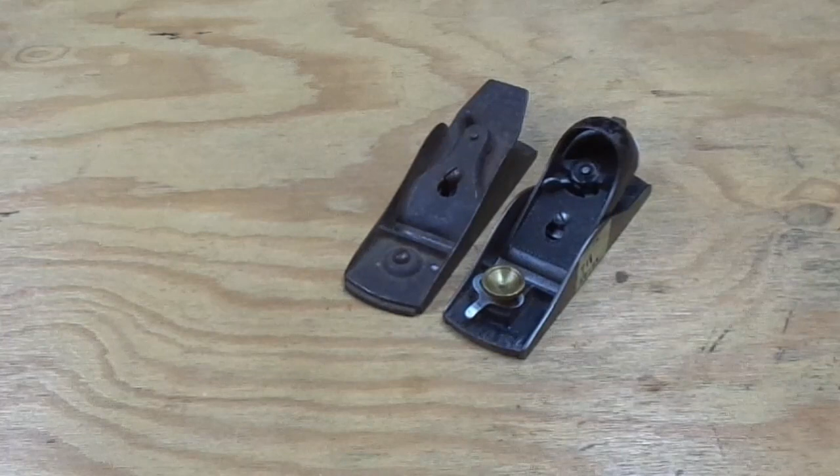This here that you're looking at is either a 9.5 or a 9 3/4 Type 1. This was put out by Stanley in the early 1870s. This was the first of Stanley's block planes, the progenitor of this guy, a later model 9.5. And Stanley basically created every permutation you could think of for a block plane.

Here's a number 18, Type 8. This is a number 17, which looks a lot like this guy, but with nickel plating. Then there was the 220 family that spun off. This is a modern English version of the 220. Here's an older version of the 220, and it didn't stop just there. Stanley came out with the simpler model, the 110, and a permutation of the 110.

And of course, it didn't stop at Stanley. Here's an American boy plane that was obviously patterned after the 110 family. And it wasn't just Stanley - all of Stanley's competitors had hand planes that looked a lot like, and certainly functioned just like, these guys. And all those block planes, I think, owe their existence to this unassuming guy here.

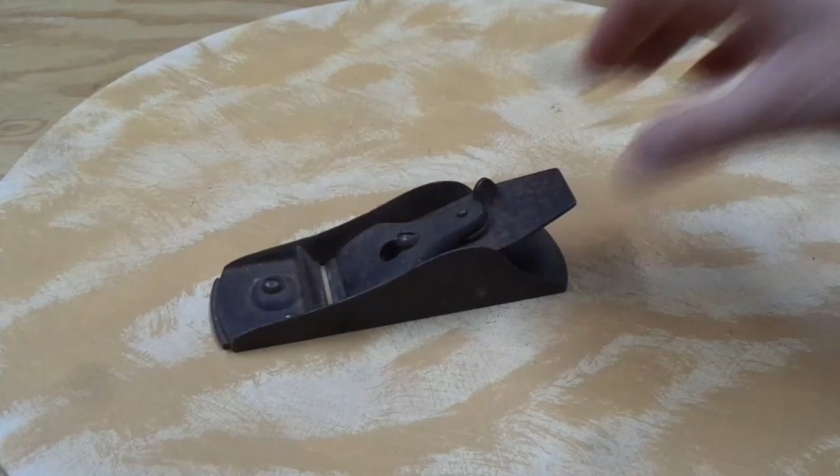There is no front knob, but instead just a screw that I have not even tried to loosen to adjust the throat in the front. The lever cap, as you can see, is kind of similar to a bench plane. There's no relief in the back, and there's the cam lever on it, the iron, and here's a better view of the body. And this is not a lateral adjust lever here, but a depth adjustment lever.

Well, I did some research on this guy. I think most of us are familiar with the common block planes, but I don't think a lot is known about these really early versions. Most of my information came from three sources. There's Patrick's Blood and Gore website, which is just a treasure trove of common language information about all planes Stanley. Virginia Tool Works had a very nice website that laid things out in an easy to understand way. And finally, there's the John Walter book.

He not only goes over all of Stanley's planes, but he has a type study on the 9.5 and 9 3/4 and its families of planes. There's also a historical narrative in the book that he refers to as a type study, written by John Wells and Jack Scholhammer. Hopefully I'm pronouncing those names correctly.

According to the type study, this model was likely manufactured in 1871 because it debuted in the January 1872 catalog. Other sources say it was first offered in 1873. The type study also claimed that the 9 3/4 debuted in the 1872 shirt pocket catalog. So apparently the 9.5 came out a little bit before the 9 3/4.

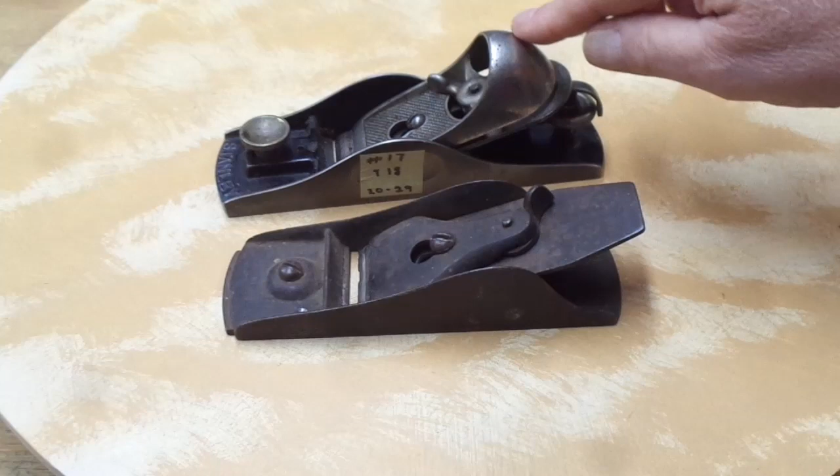Stanley almost immediately went to a different lever cap design, and I don't have a Type 2 to show you, but from the drawings and pictures I've seen, it's kind of similar to this one. It curls up a little bit more, but they very quickly got a more bulbous raised back here to push on. And after several permutations, it eventually morphed into this shape that we're all familiar with.

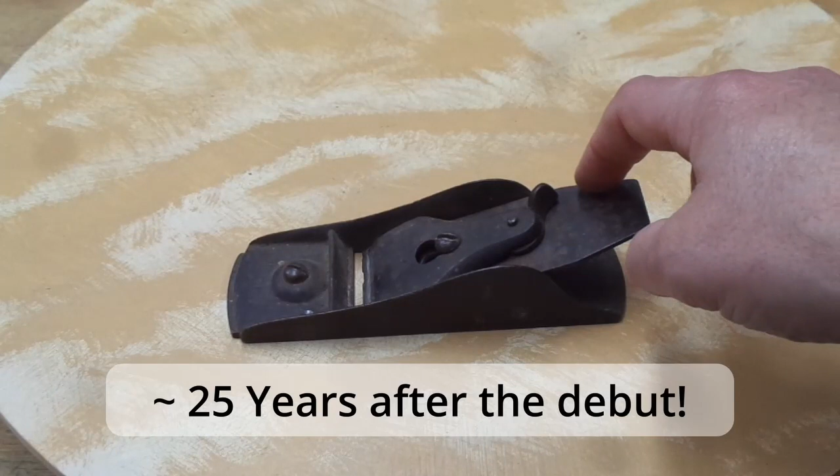Stanley didn't get around to making the rounded back iron until the late 1800s. And with the debut of Type 2, there was a knob that appeared here. However, the eccentric lever we're all accustomed to didn't show up until around the 1890s. This backward-leaning stance of the cheeks is known as the Excelsior body style, as opposed to the far more familiar, more or less centered cheeks of pretty much all of other Stanley's planes.

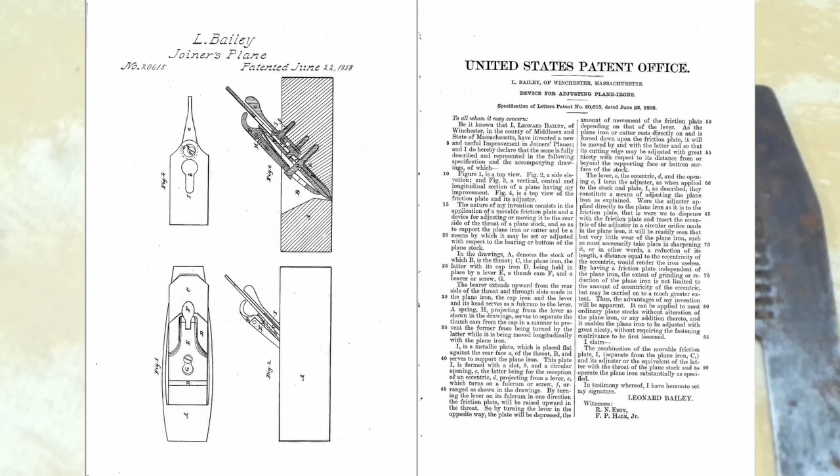This depth adjustment lever here is covered by Bailey's patent of 6/22/1858, which describes using an offset cam type lever to advance and recede the depth of the cut of the iron. Here you can see the pivot point is offset, and there's a pin which engages these grooves in the back of the iron, and as you move the lever back and forth, the pin goes forward and backward, adjusting the depth of cut. So here's the patent.

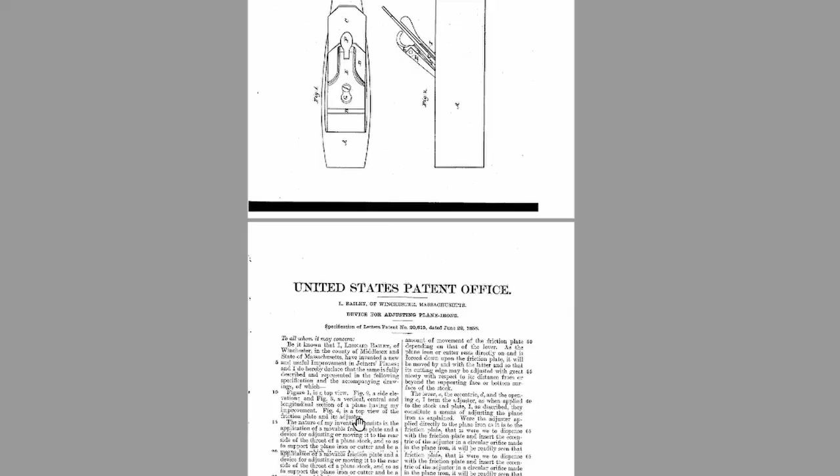Here's the diagram of the business end of it. And this here sits behind the iron and the cap iron and the lever cap. It's kind of hard to see. Here's the lever, and here's the screw. That's the head of the screw here.

And let's go down and read some of the text just to get a flavor for it. So it starts up here at the top. I, Leonard Bailey of Winchester in the county of Middlesex in the state of Massachusetts, have invented a new and useful improvement in joiner planes.

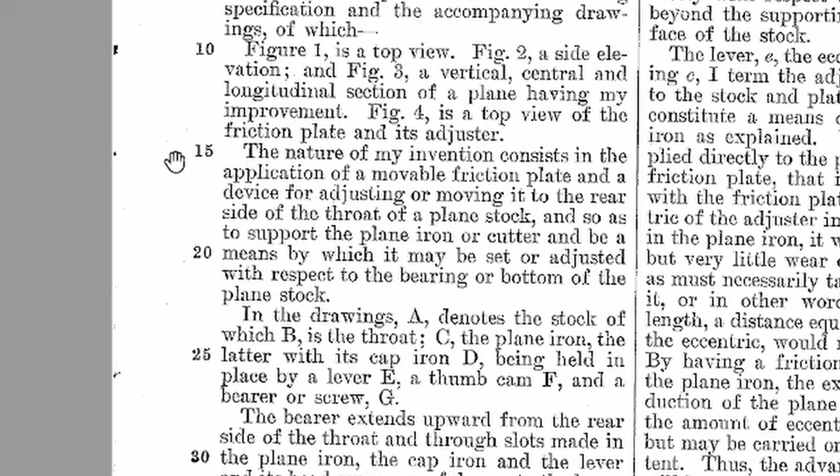He says up here in this paragraph next to number 15, the nature of my invention consists in the application of a movable friction plate and a device for adjusting or moving it to the rear side of the throat of the plane stock, so as to support the plane iron or cutter and be a means by which it may be set or adjusted with respect to bearing or the bottom of the plane stock. So I think this is a very long-winded way of saying it provides precise depth adjustment.

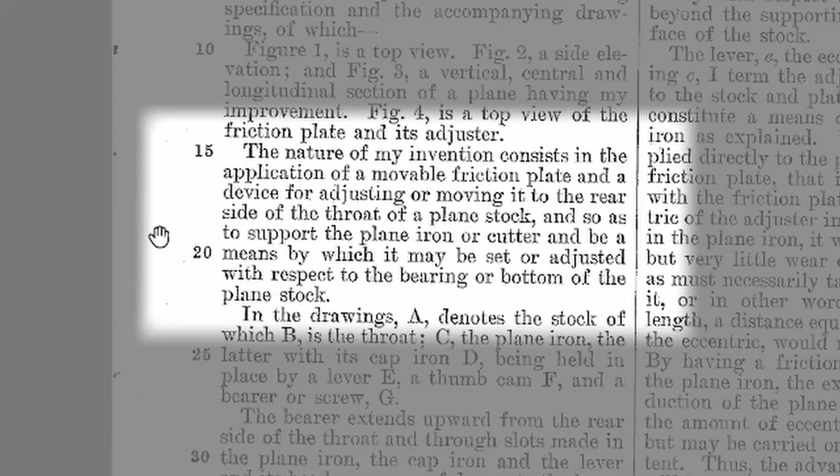But the real business end of what he's doing doesn't start until this bottom paragraph here on the left. He describes I as a metallic plate which is placed flat against the rear face A of throat B and serves to support the plane iron. This plate I is formed with a slot, little b, and a circular opening, little c, the latter being for the reception of an eccentric, little d, projecting from the lever, little e, which turns on the fulcrum or screw, little f, arranged as shown in the drawings.

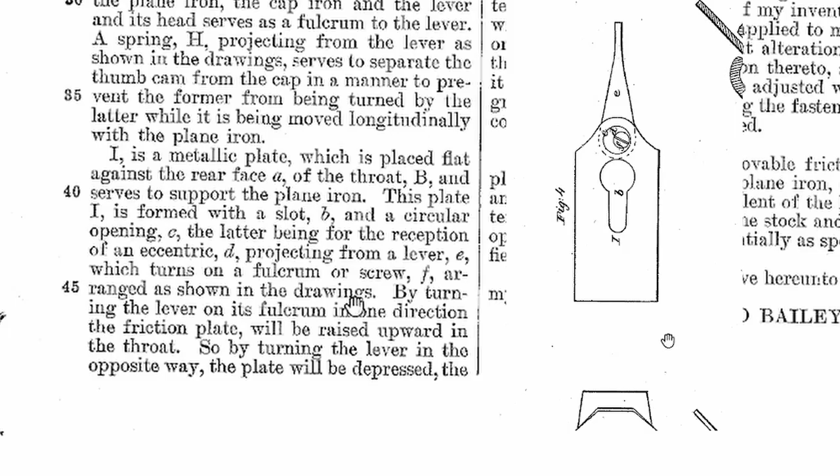And that's basically talking about this business here. Here's the plate I with the slot in it, B, that has a hole in it, little c, that takes the eccentric, which is little d right here, and it turns on a fulcrum. F is the top of the screw, and here's the shaft of the screw in the side view, and little e is the lever. You can see where this screw is off center.

If you were to rotate this lever counterclockwise, the eccentric, or the disc, would rotate downward a little bit, pushing this entire plate downward. And the slot in this plate, through this big screw, similar to a modern plane that holds the iron to the cap iron, this holds the iron to the cap iron and this plate in the back of it. So as this plate moves downward or upward, it carries with it the iron and the cap iron. So that's kind of a difference between a modern hand plane.

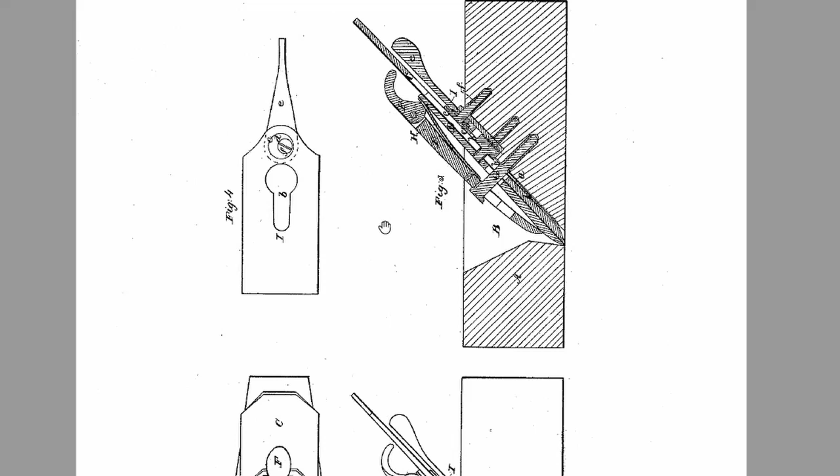Usually the depth adjustment reacts on the cap iron directly. And I think as soon as they started building this, somebody pointed out, you don't even need this plate. You could just have this depth adjustment mechanism operate on the cap iron directly. And they eliminated this whole thing.

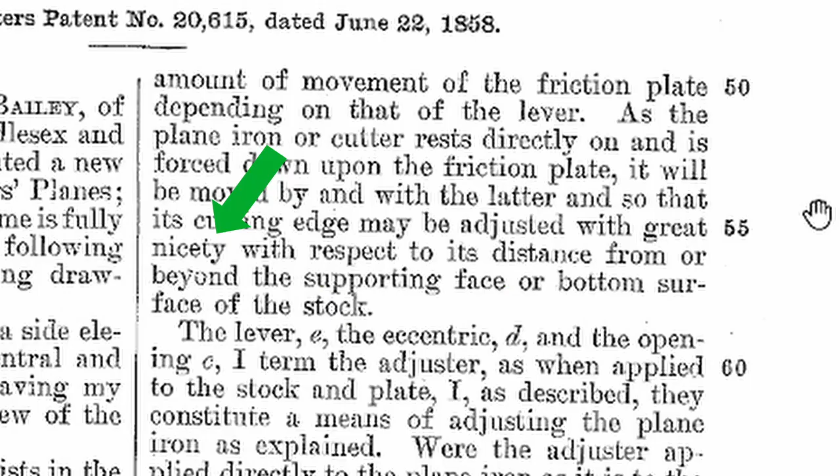If we go back to the text, he says by turning the lever on its fulcrum in one direction, the friction plate will be raised upward in the throat. By turning the lever the opposite way, the plate will be depressed. As the plane iron cutter rests directly on and is forced down upon the friction plate, it moves with the latter so its cutting edge is adjusted with great nicety relative to its distance from the supporting face or bottom surface of the stock. Boy, isn't that an awful lot of words just to say you get a nice precise depth adjustment effect.

Another interesting thing he describes in this paragraph is where the adjuster is applied directly to the plane iron versus the friction plate. That is, were we to dispense with the friction plate and insert the eccentric of the adjuster directly in a circular orifice made in the plane iron, it would readily be seen that very little wear of the iron is permissible, such as must necessarily take place in sharpening it. In other words, a reduction of its length by a distance equal to the eccentricity of the eccentric would render the iron useless. So basically he's pointing out you need a carrier independent of the iron, because as soon as you sharpen it and remove enough material equal to the depth adjustment, the iron becomes useless since you can no longer plunge it deep enough to get a cut.

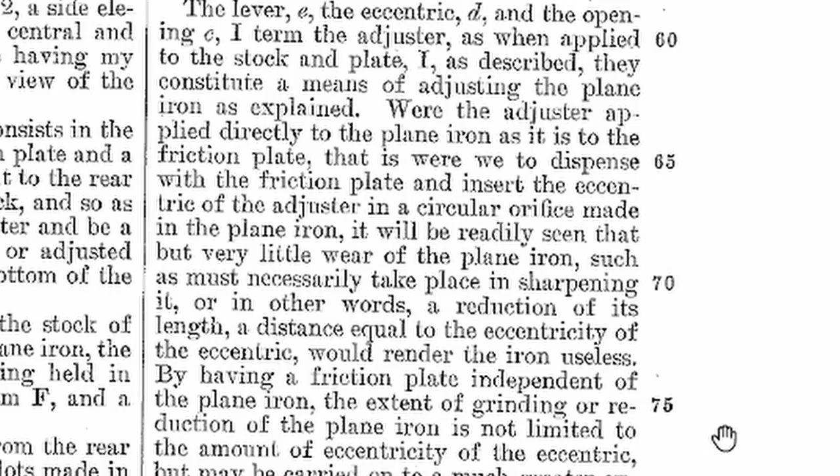So I think that is the genesis of attaching it in later years to the cap iron. I thought that was kind of cool. I always like reading these things.

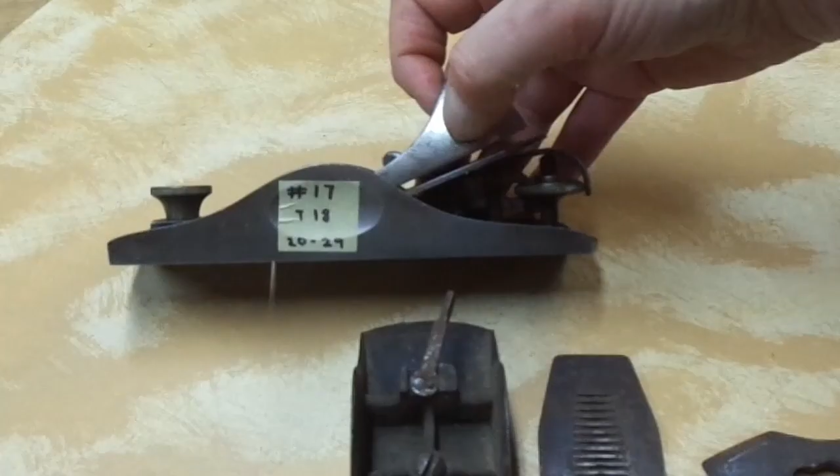This depth adjustment was somewhat fragile, so Stanley quickly abandoned it for the more elaborate knob and lever of the early 1880s. This configuration here.

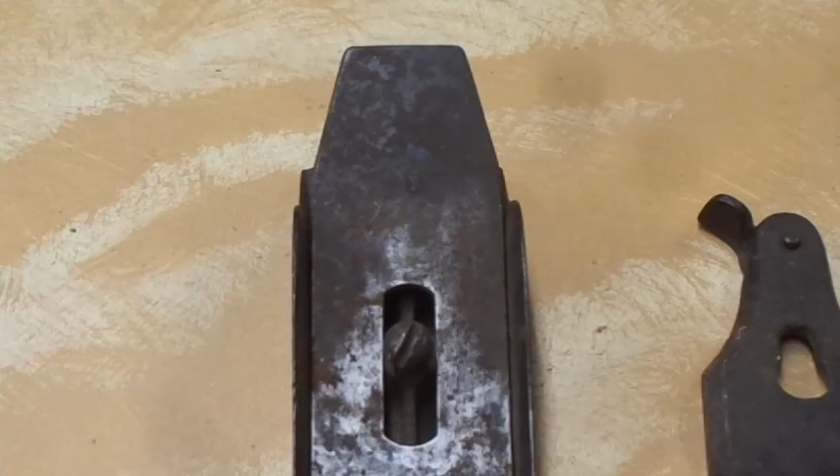The iron miraculously doesn't seem very pitted, but it certainly has its share of surface rust. I don't know if I'll be able to get a clean view of the trademark. I can barely make it out, even under magnification, and that's because I know what I'm looking for. It's referred to as trademark A1 in John Walter's book.

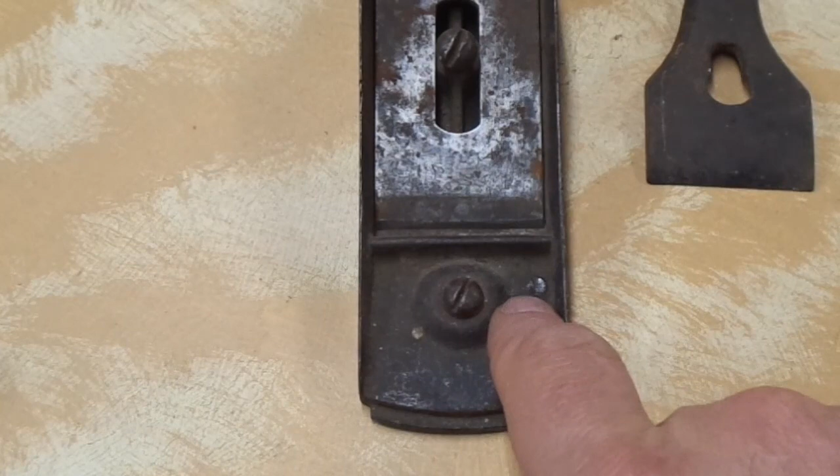Unfortunately, my example here has what looks to be a divot drilled into it from a modern twist drill bit. Almost looks like somebody was trying to test if this was a material that could be drilled. What a shame. I didn't find any information as to whether or not this was originally japanned.

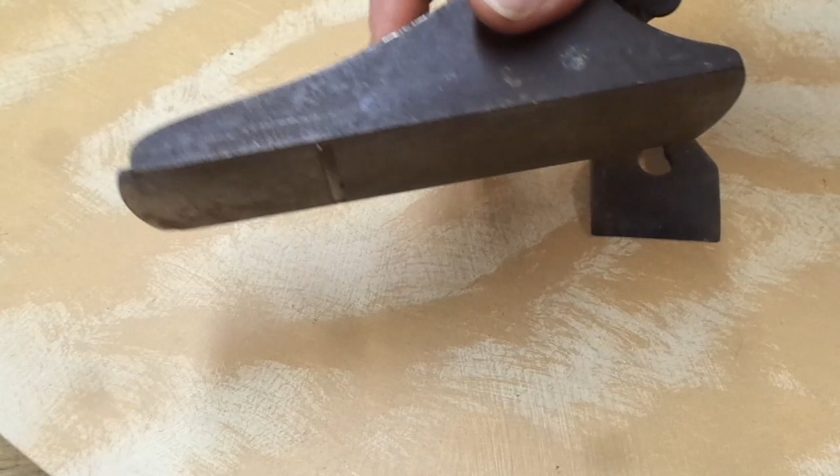I don't personally see any remnants of anything like paint on it. It does look as though it may have been blued, but this may simply be a magnetite coating from many decades of oxidation. By magnetite, I mean this dark form of oxidation you see in a lot of old steel tools. It's a form of iron oxide that's reasonably stable and offers a teeny bit of protection.

I posted some pictures of this guy on a forum and asked specifically about this tapped hole back here. The feedback I received was that this was indicative of actually a 9 3/4, and it was lacking the tail knob.

As luck would have it, I found a suitable tail knob of the correct vintage. As I mentioned earlier in my research, I do believe the 9 1/2 had this tapped hole too, so I'm not sure this was originally sold as a 9 3/4, and I'm not sure if there's any way to tell. But this, combined with this, for all intents and purposes, makes a 9 3/4.

In terms of tuning up, restoring, or cleaning up, it's probably going to be closer to nothing. I almost certainly will soak this in liberal amounts of oil before I try to loosen the screws and the cam lever here, and I will certainly try to clean it up with soap and water.

But stay tuned. Well, that's all I have for this guy.